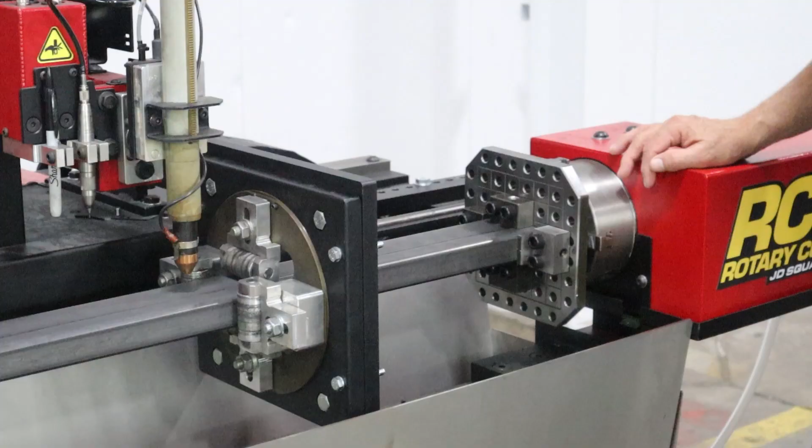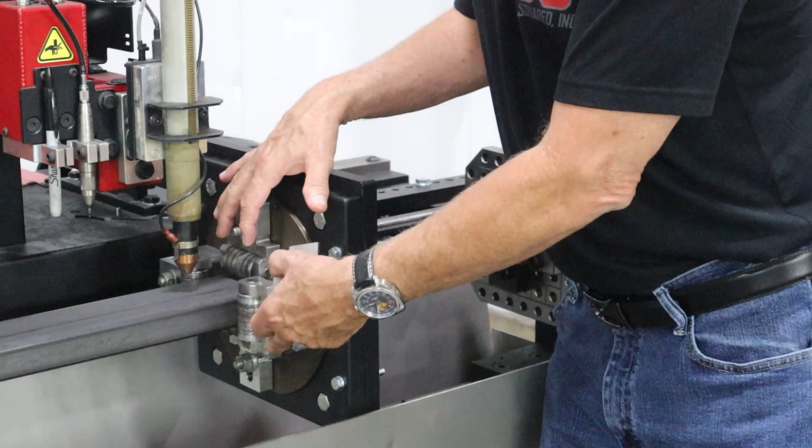I went ahead and zoomed in so that you could see we have installed the square tube stabilizer. As shown in prior videos on the stabilizer, we used our gauges to set our rollers. Very easy to do. We've also utilized the universal jig plate for this particular application.

These are very simple. They're essentially a plate with a grid, a 1x1 grid, 6 by 6 inches total, that has been drawn on it or engraved in it. Then we have different blocks that we could position in different locations in order to handle weird shapes, for instance, angle iron, channel. In this particular case, we're only handling rectangular, so it was pretty easy to do.

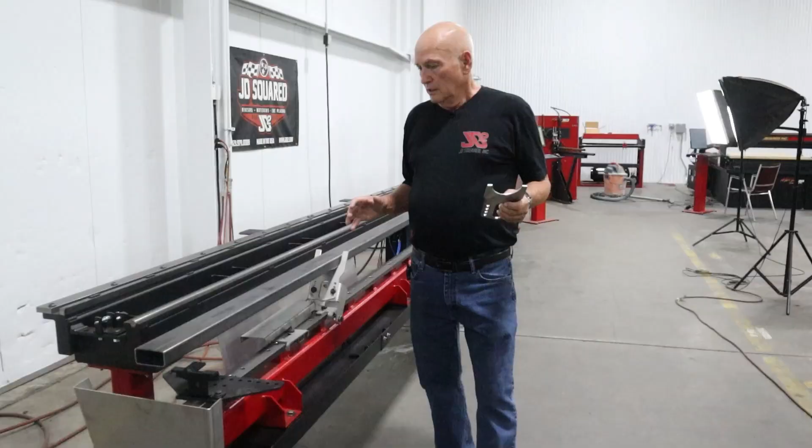All right, let me go ahead and reposition and show you the machine in entirety so I can show you the next thing that we did to set up for this job. I'm at the far end of the RC6 rotary cutter to show you a couple things.

In this particular job, we're going to be utilizing 2 lifters in the RC6. You can mount up to 4 lifters, but this job we're going to use 2. What we've got is, this is the lifter right here. Now, we made the lifter so that we could alter the plates that we bolt onto it depending on what kind of profile we may want.

So it turns out that for this 1.5 by 3 inch rectangular tubing, it's just about 3 1/4 inches from corner to corner, like this right here. So what I did, I went ahead and made a plate that was 3.3 inches in diameter, or at least the arc is, and then we brought the sides up 1.5 inches. Now that will help support the rectangular tubing as we rotate, but keep in mind that it isn't going to do what the rings would do.

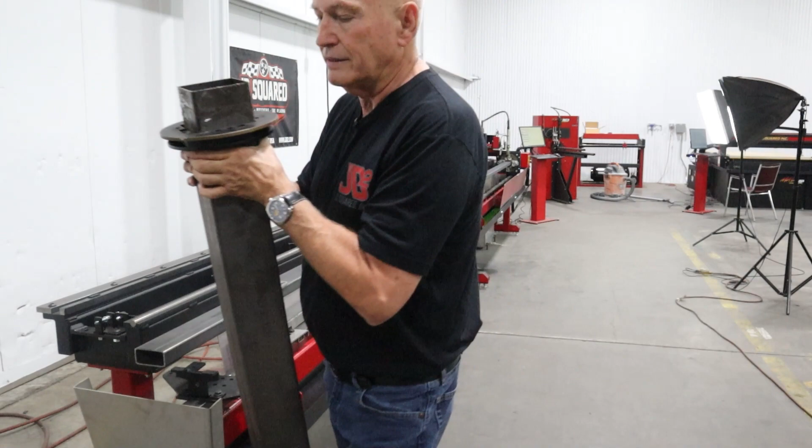This, for instance, is a ring assembly on some square tube right here. This we would be able to roll in our bearing blocks and basically have perfectly smooth motion. We're not going to get that with the lifters and these plates. What we're trying to do is hold the tubing up, kind of hold it in the middle, so it's a little bit clunky.

Now if you notice right here, I have a piece that is supplied with the machine. It folds up flat, and the reason I have it down here is whenever I home this machine, I place a piece down here that I can roll up like that, so that when the lifters fall—because whenever we home this machine, all the lifters have to get out of the way so that the head could go by—I'll use this to support the end of the tubing. So that's just a quick little tip for you right there.

Anyway, I'm going to go ahead and place in the stainless steel guards so that our water is routed into the tray, and we'll start cutting on this thing. One of the first things we need to do after we load our tubing up is for the machine to know where the center of rotation is.

So we're going to go to the right top screen, and I am going to pick a wizard. Here in the wizard, we have currently 3 choices: structural, round, or rectangular/square. Let's go ahead and pick rectangular.

All I have to do is fill out the boxes. One of them is asking for the tube width. We're going to put 3 inches, because when we created this program in Cam-A-Lot, we started off with the large side flat. So we're going to say 3 inches. Then we're going to go over here to tube height, and we're going to say 1.5.

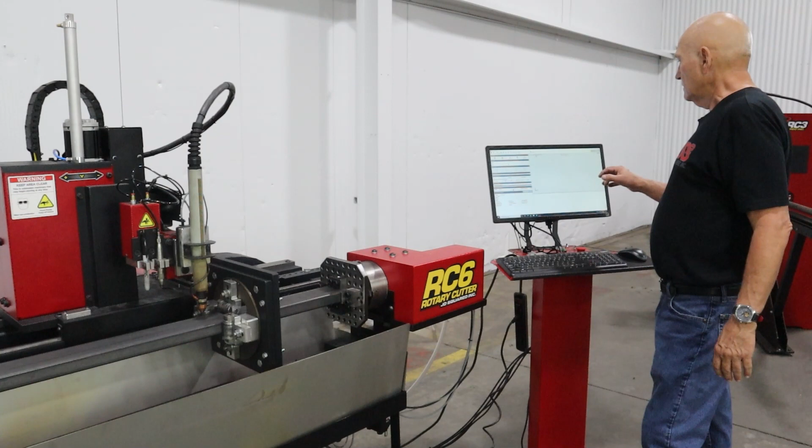And what it did, when I returned back to the plasma cut screen, it has generated a small program that the RC6 is going to run to find the center of this. Let me zoom in on that so you can see it a little better, and then I'll hit the go button.

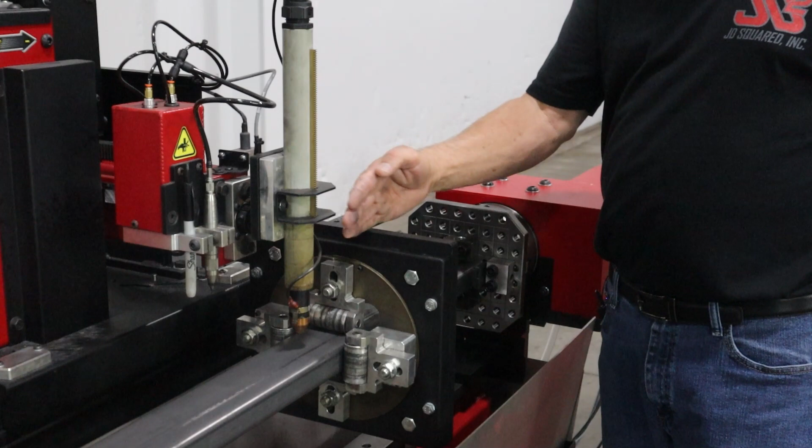All we need to do is position the torch somewhere in the middle of the tubing, just above it, and we roughly have it leveled. It doesn't need to be precise. Let's hit the run button.

So what it's looking for now is how far out of line is the chuck. Do we have to rotate a little bit to get the top surface flat? All right, now it's going to check both ends of the tubing to locate the middle of the tubing.

Okay, we're done with that. The RC6 now knows where the tubing is at. Keep in mind that you only need to do that when you first load a piece of tubing. If we were doing 100 of these, we would not have to keep repeating this, only for the first job.

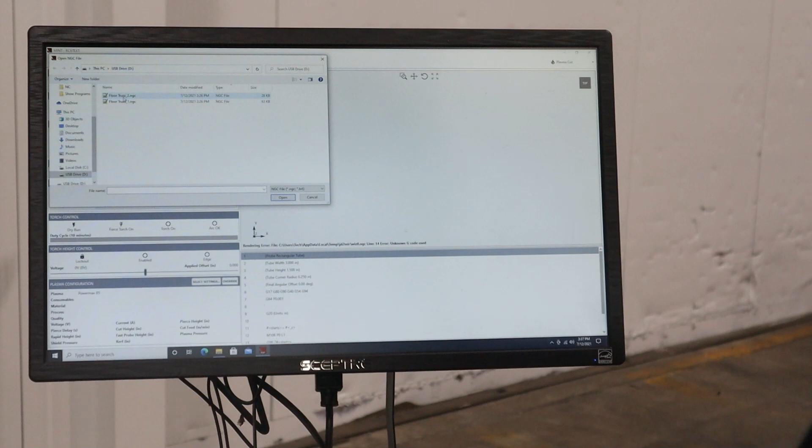All right, now we need to go ahead and load up our program. So I will go to File, Import NGC, and looking at the USB drive, I'm going to go ahead and pick floor truss number 1. This was the code that we generated earlier in Cam-A-Lot.

Now if we roll this over here, you can kind of see what's going on in the view, what we're going to be doing. All right, so the next thing we need to do is tell the RC6 where on the tubing do we want to start cutting. Let me reposition the camera and show you that.

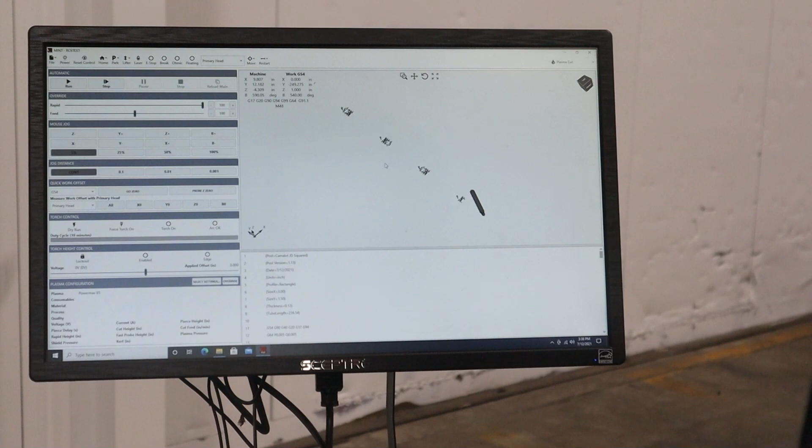All right, I'm back on this end of the machine right here. Let's go ahead and run the carriage to the end of the tubing. Now, when we generally run a program, we're going to move the torch to where we want the RC6 to start executing that program. Notice the lifter is automatically lifting and getting out of the way.

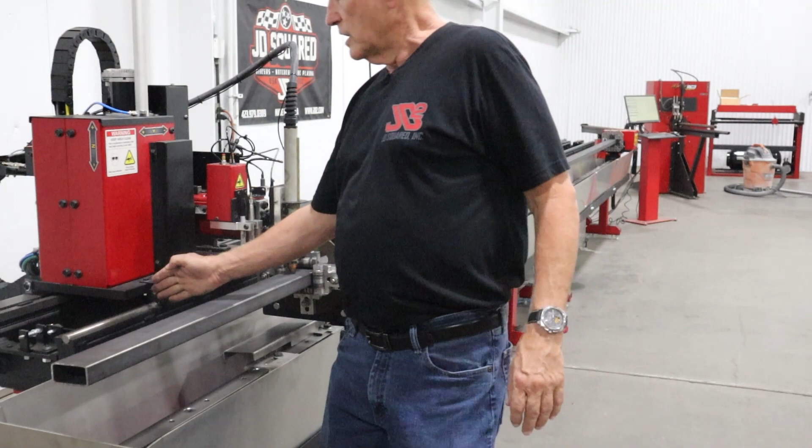Now, what we're going to do, we'll get a little bit of help here, we want to come as far as we can down this frame rail without actually going to the end. If we do go to the end, the carriage will not fall off the machine, but it will, however, hit the bump stops, which will reset the machine, making us have to rehome it.

So we don't want to get that far down. We want to get to about an inch or so. The bottom line is this tubing that we put in the machine is a little big for the job we're doing. We could have cut it shorter, but we just threw a piece of tube in.

So, all right, Ryan, if you could do me a favor, just give me a heads up when I'm about 2 inches from that right there.

We got different speeds that we could run the machine at. We're going to go medium speed. Now we're going to go slow. How far? Good right there?

All righty. So what I'm going to do now is I am going to select Y0 under Quick Work Offset. And what the Y0 setting is going to do is the RC6 now figures that this, as far as that program is concerned, is the 0 point. We're going to start cutting at this particular location right here.

So let's go ahead back to the other end, and we're going to run the program. However, if we turn on the coolant, it's going to run off, we're going to flow out over here. So give me a second to figure out what I want to do there to prevent that from happening, then we'll run the program.

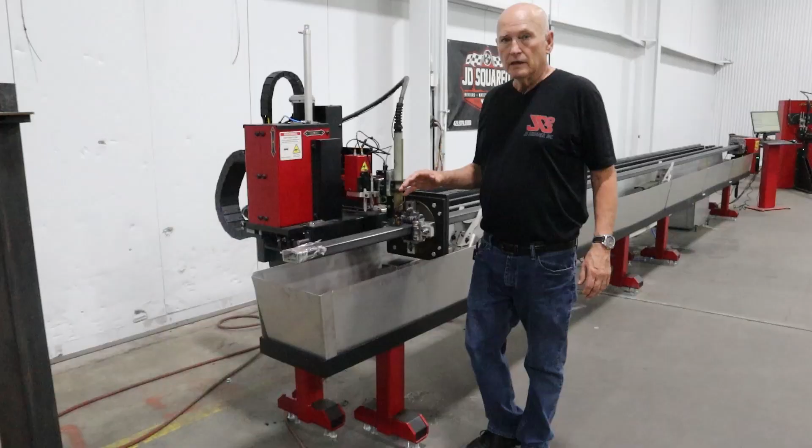Devin came up with a pretty good idea on how to seal the end of the tubing: just simply use packing tape. As soon as we cut through the tube here, the coolant will start running out that side and we won't have an issue anymore. So the only thing we're going to need to do now is go down and tell the RC6 what material we loaded, mild steel .125 wall. That's the subject of another video. You can check that out. But let me walk down to the other end.

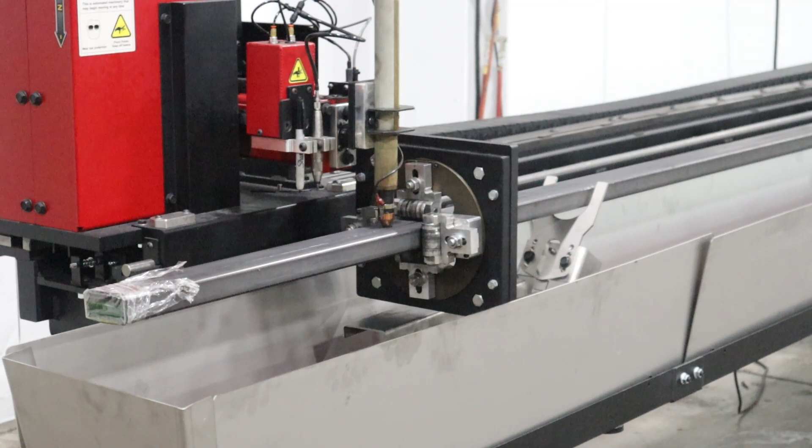In the meantime, Ryan, if you could do me a favor and zoom in a little bit so that they could see the stuff being cut and marked. All righty. Way down here, I am going to go to select my settings. I'm going to pick mild steel. We're going to pick 10 gauge, and we're pretty much good to go. All right, let's hit the run button.

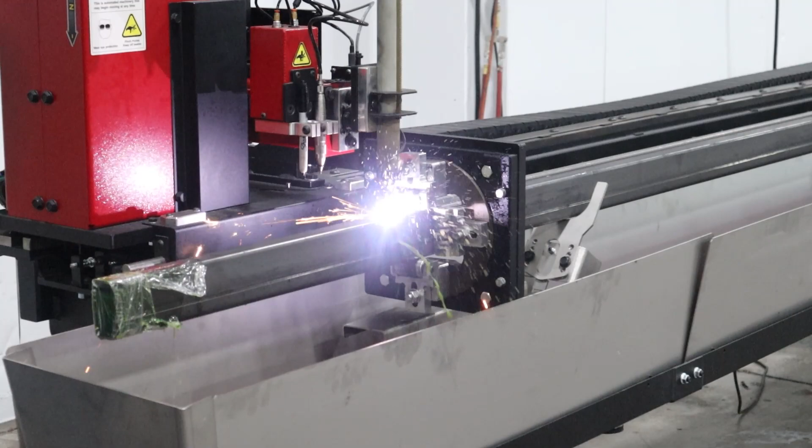All righty. First thing it's going to do is use the marker to mark. Looks like it's going to be number 24. It is. I'm going to come over here to this side so that when it cuts, I'll just remove this piece out of the machine. A lot of coolant.

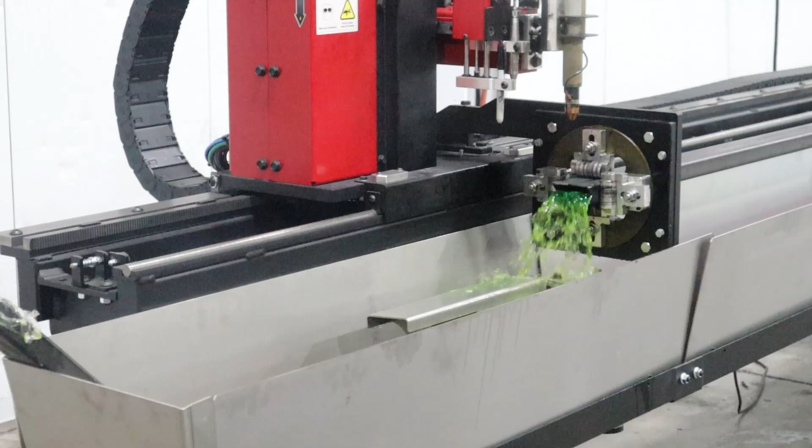Now, I can catch every single piece, or I could just let them fall. Let's watch it fall. No big deal. Once again, it has grabbed the marking tool. This is probably going to be number 23. Yep. All righty. You can see the automatic lifters retracting.

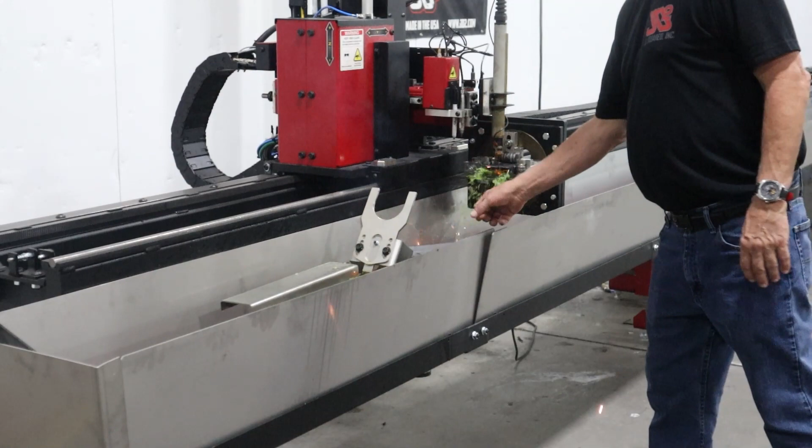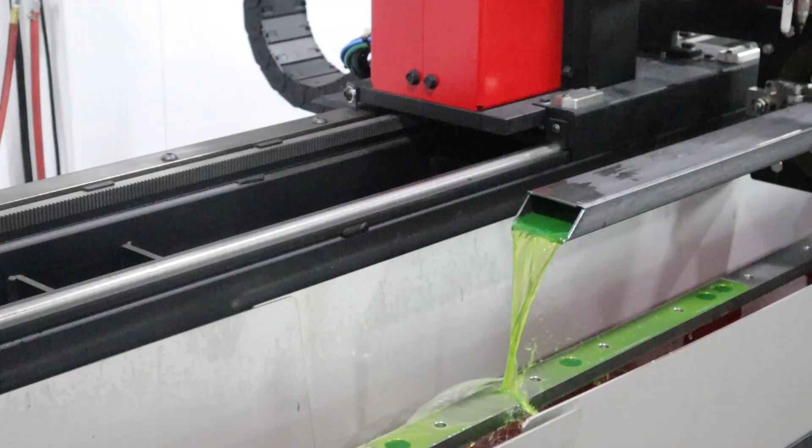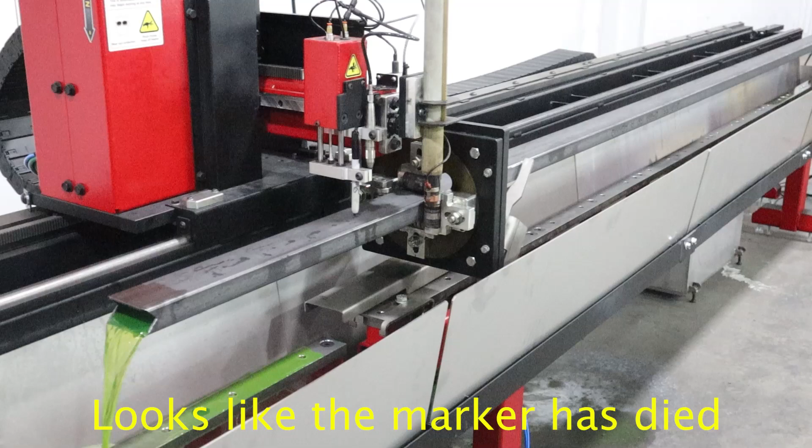Yeah, a little bit. All right. So if we look at one of our pieces right here, you can see very little slag. Well, I think you can see it. But this is what we're going to be putting together to create that truss. No marks.

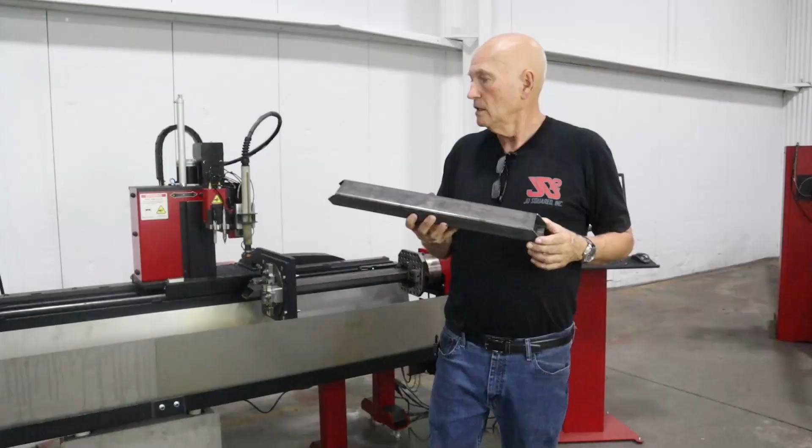We've completed the first program. We've cut out basically 10 of these parts here. I think you could see that we have marked them. So this is part number 21. I am now going to go ahead and load up the second piece of tubing and we'll process that one.

Go ahead and turn the marker on, push the button. That looks nice. I had to put a new marker in it. The other one kind of ran out of ink. Oh yeah, it looks really good. Nice 13.

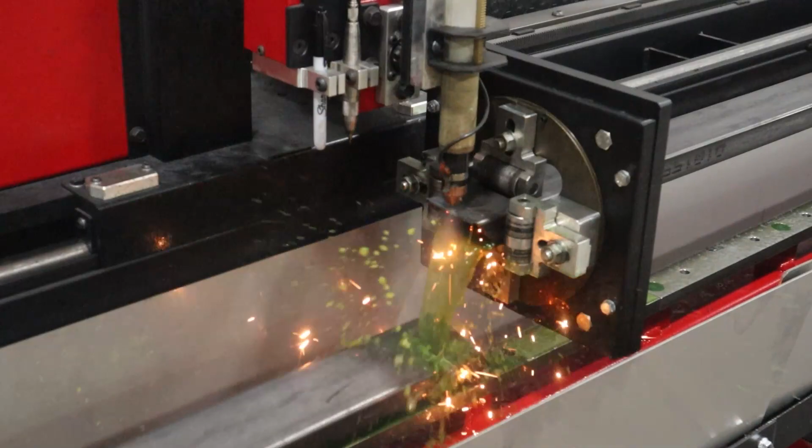Okay, I'm going to go ahead and pull the camera off the tripod so that we can get a little closer view of what's going on. Alrighty. It has dropped the marker. Now it's going to mark this part number. Part number 11.

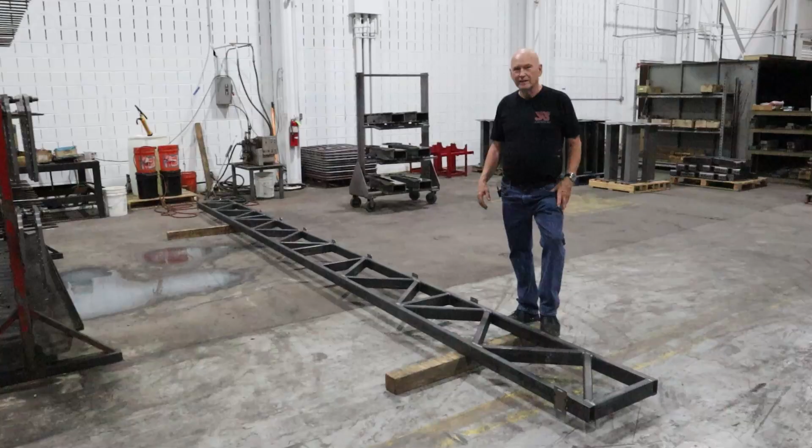Okay, we'll let this continue cutting. I think it's only got 2 more parts. So I'll go ahead and kill it right here and then I'll show you the finished product. Well, we did it. This is our truss. Takes about 4 people to move this thing. It's heavy as all heck, 22.5 feet long. And you saw us make all the diagonals in the RC6. We could have done the verticals too, but sometimes a saw is the way to go, and this was one of those cases. Well, I hope this video was educational, both parts of seeing how the machine cuts and also Cam-A-Lot.

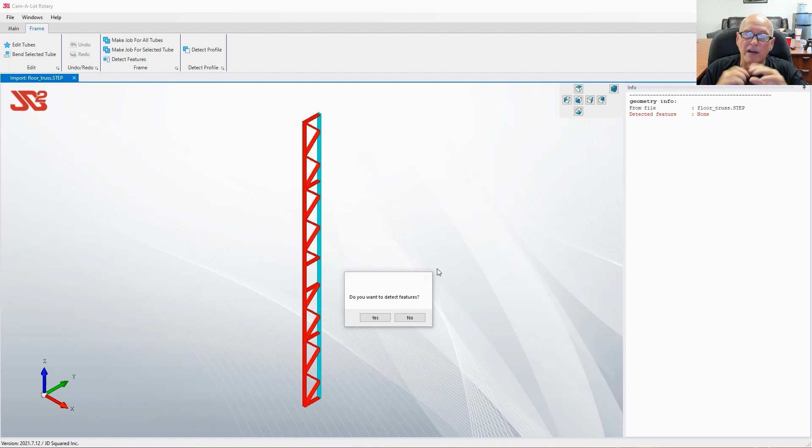But you could have other sizes of tubing in your structure, just different wall thickness, different sizes, and Cam-A-Lot will go through that, find all of the different sizes, organize them into different jobs so that you could go out to the machine and create it. However, for this application, it is just one size of tube. So let's go ahead and select, yes, I do want you to detect features.

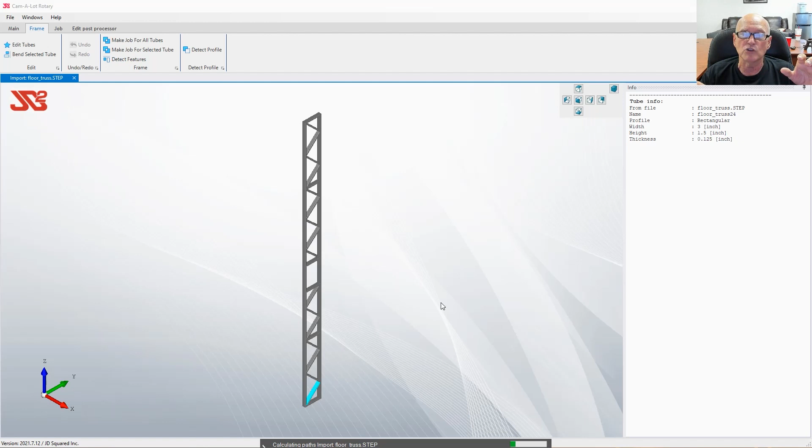And you'll notice Cam-A-Lot will be popping up a screen here in a minute as it identifies these individual parts. And what it's asking right here is, do you want to make a job for that? We're going to say yes. Now it's going through the individual parts. Now a job is going to be the file that we are going to tell Cam-A-Lot where to make the cuts. Do we want to put special markings on it, which we are in this project, things like that.

So you can see the progress bar down here. Cam-A-Lot is going through that entire structure. It now wants us to save the job. We're going to save it as floor truss, yes. And there we go. We now have a job created for this part. Let me go ahead and show you some of the things you see on the screen, since this is a tutorial of how to use Cam-A-Lot.

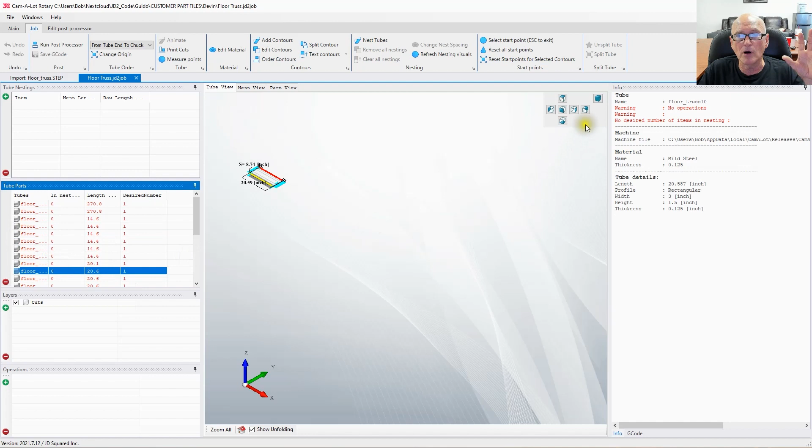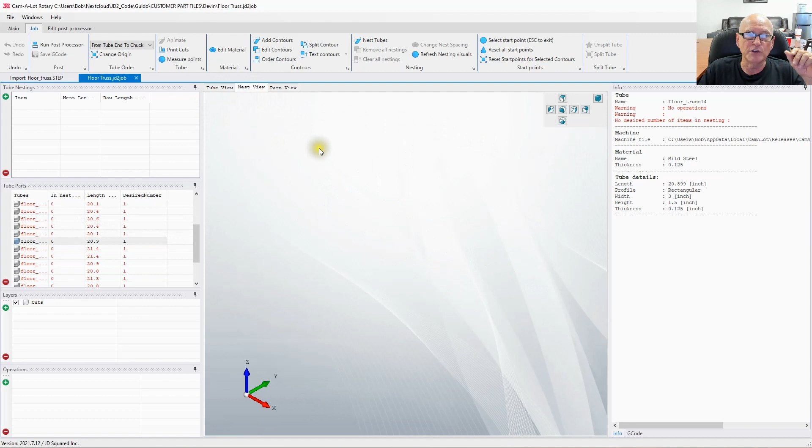Right here in the central viewport, you have 3 tabs. One is tube view, and what that's going to do is when you come over here to tube parts, if you select the different parts, it is going to allow you to see what those individual parts look like. If we go to part view, you will see the entire structure, in which case you could come along and select a single part here, and it will highlight it over here, so that if you go to tube view, there's that particular part right there. Now the nest view tab isn't showing anything yet because we haven't created a nest.

Let's look over here on the left side. You obviously now know what tube parts is doing. We just select on the individual parts. In this particular panel here, we can override by double clicking, for instance, the number of parts that we may want to make. In this case, we're not going to want to make any more than one because we only need 1 truss.

Now down here in the layers panel, when Cam-A-Lot creates structure like what we're seeing in a job, it's going to break things down into layers. Now a layer can contain a number of similar items such as contours, markings, things like that. Well, what we call a cuts layer is typically what you see on the screen in front of you, the ends of a structure or a piece of tube.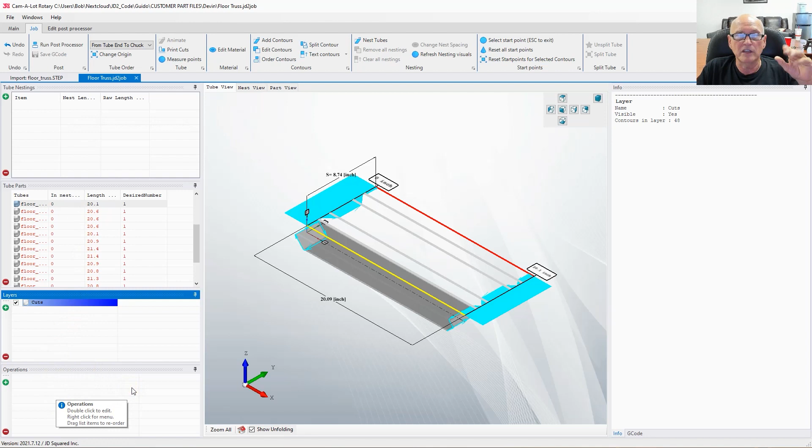Now, if these parts had holes in it, they would have been placed on the layer holes by Cam-A-Lot. Also, if there was markings on it, such as part numbers or a logo that you may have imported as DXF and placed on your part, it will also place markings into a separate layer. Now, if we come up here to tube nestings, we have not created one of those yet, so therefore it is empty. And down here in the lower left is where we create our operations. So let's go ahead and do that now.

To create an operation, come down here to the lower left panel, Operations, and click on the plus sign. And that will bring up our Operations dialog box. We have a Powermax 85 selected. That's what's on the machine. We set that in the main settings in Cam-A-Lot. Now, Cam-A-Lot has gone through and already determined that the metal thickness is .125 wall, so we don't have to do anything there. Now, if we look right here, we have layers.

We only have 1 layer, cuts, because that's all Cam-A-Lot could find. That's all there was in that structure. Right here, we have the contour offset, and we could change the offset. I've shown that in similar videos or earlier videos, such as the card holder video. And essentially, you're going to want to place the kerf half of the distance away from your contour that you want to cut, the kerf being the slot that the torch is cutting through the part.

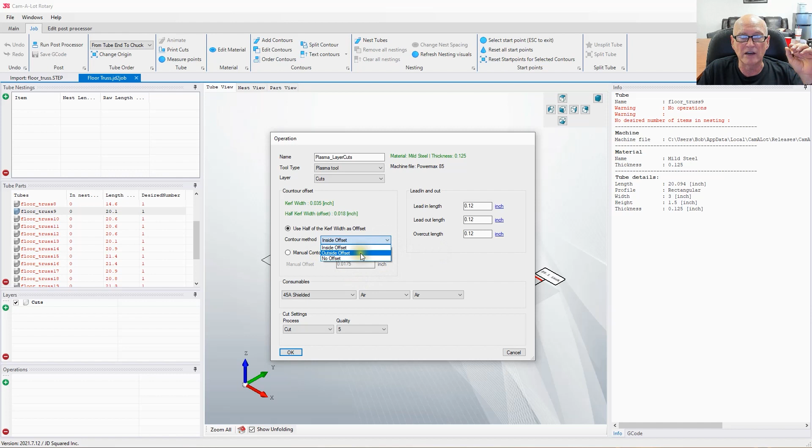So Cam-A-Lot is going to look up into its database tables supplied to us by the plasma power unit manufacturer and determine what that kerf is. Now we need to go ahead and select 45 amp shielded because that's what we're dealing with on the machine out there. Now it's going to offset it 17.5 thou. We're going to go ahead and pick outside offset and select OK.

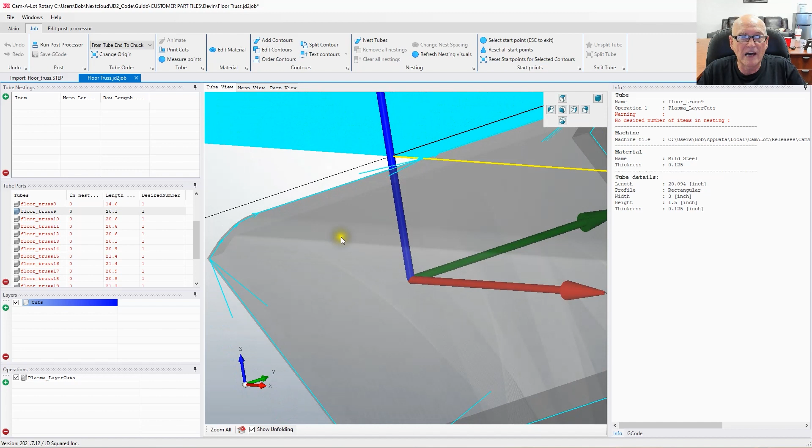Alrighty. So what we're doing now is if we zoom in and we look at the different parts, let's go here. I want to show you. Okay. You could see where we have applied an offset, but we have applied it the wrong direction of the tube. You can see that we've actually offset inboard. Now, I'm going to tell you straight up, this is a recently identified bug. It's a very minor deal. It's not a big deal. However, rest assured, we are in the process of fixing that.

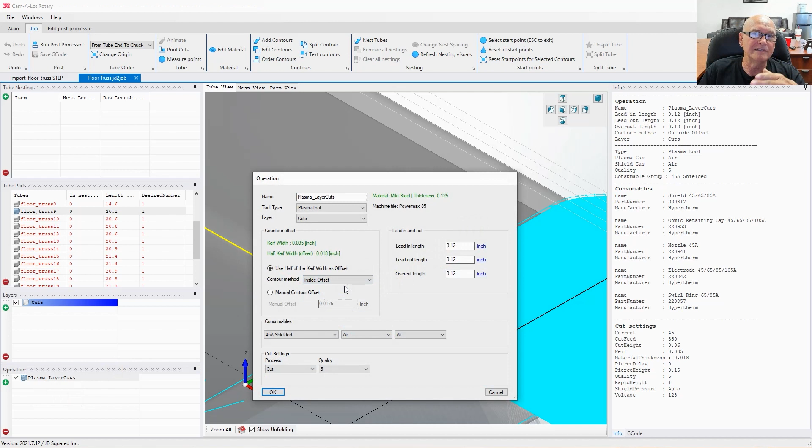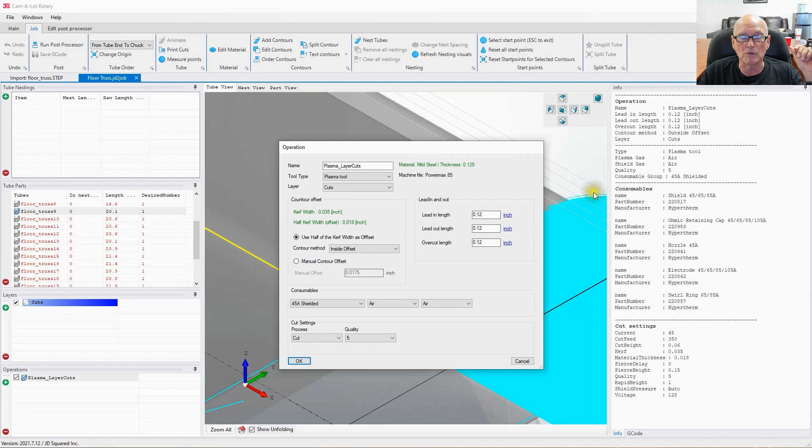So let's go ahead, go back to our operation, left click on it, and edit it. And instead of an outside offset, which is the correct method, we're going to go ahead and select inside to temporarily move it to the other side. Now this bug evidently came about because we are adding structural shapes to Cam-A-Lot, angle iron, channel, and we've had to change the algorithms that are handling the contours, and evidently we made a slight mistake there. I wish we were perfect, but we weren't. Good news is we write the software and we can fix this problem relatively quickly. Let's go ahead and say OK.

Alrighty, now if you noticed, we are now correct. If I zoom in right here, you could see where the cut path has now been offset to the outside of the part. We're actually good to go if we wanted just to go out there and cut these, but we don't. We want to go ahead and use another feature in Cam-A-Lot because, as I said earlier, all of these diagonals may be slightly different from each other. So it would be of great help if we could number these, and Cam-A-Lot will allow us to do that. So in order to do that, we're going to go up and select text contours and select part numbers.

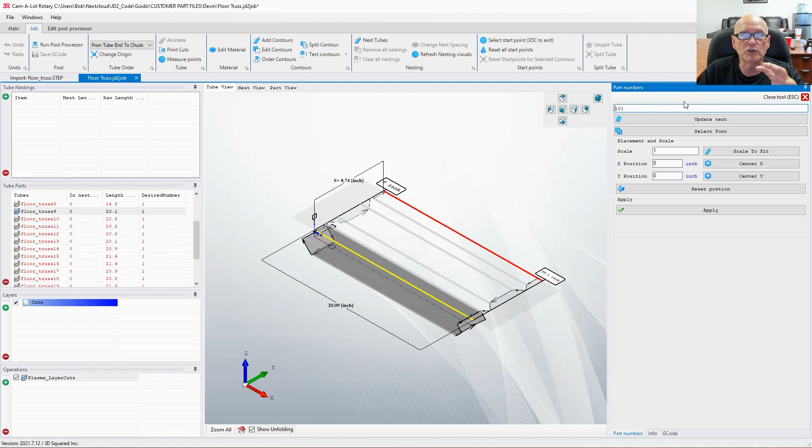And we're going to come over here, and if you look, it says part underscore, and then it's got the squiggly parentheses and a 0 in the middle. Now what the squigglies are going to do is apply this auto incrementing number. So if we do this to all of our parts, it will auto increment the number 1, 2, 3, 4, 5. Now, this part in front of it, we could put whatever we want on it. You could type in a part number, whatever you want. We're not going to do that because we just want a number that the welders could refer to on the drawing and know to place that part in the right spot.

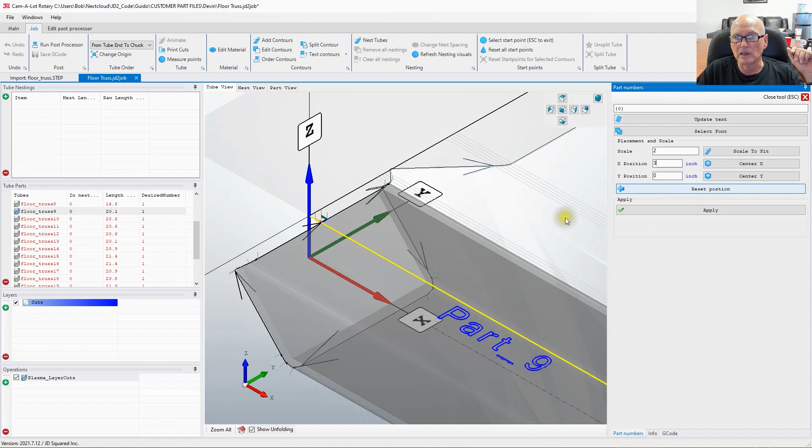Let's go ahead, and if I zoom in over here, you can actually see what it's going to put out, right? Part number 9, because I haven't updated anything yet. Let's go ahead and increase the size of the scale. I want it a little bit larger, and I also want to move it over about 3 inches because I know that's a safe distance on what we're doing on this part. Now, if I select center Y, let's zoom out here a little bit, it moved it to the other side over there, but it centered it on the part, which may work good. So let's go ahead and update our text. Now we just have our number 9, and we go ahead and apply it. All righty. Give it a second to apply.

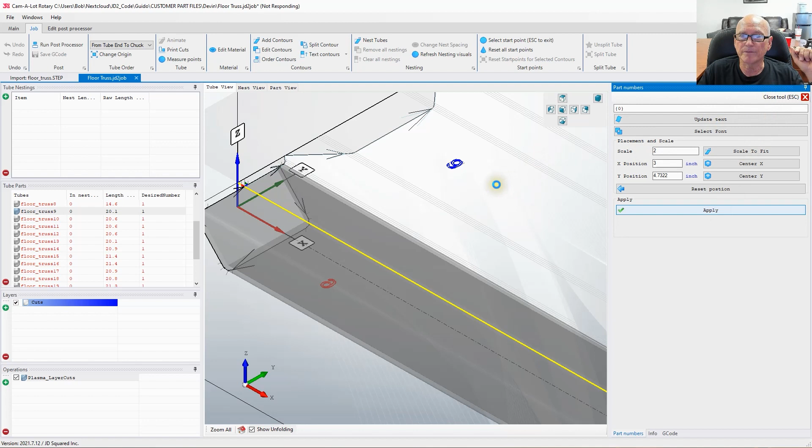All right, we did all that. Let's go ahead and close this tool. Now, if we were to go look at the different parts, you see the number right here? 13, 11, 12. So we now can make an operation to put these part numbers on those parts out there.

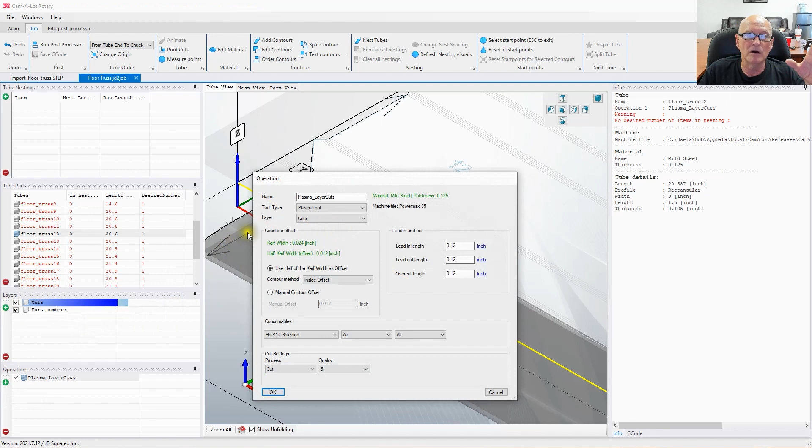So once again, let's return to operations and click the plus button. But this time, if you notice over here, we have a new layer called part numbers. So we are going to select that layer and we are going to use the marker. Now we could scribe it. If we scribe it, it's a permanent mark in your metal. If we use the marking tool, it could be later removed with acetone or something like that.

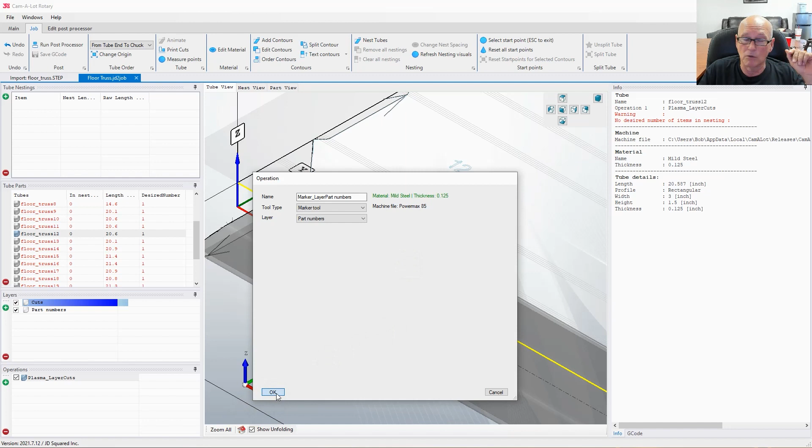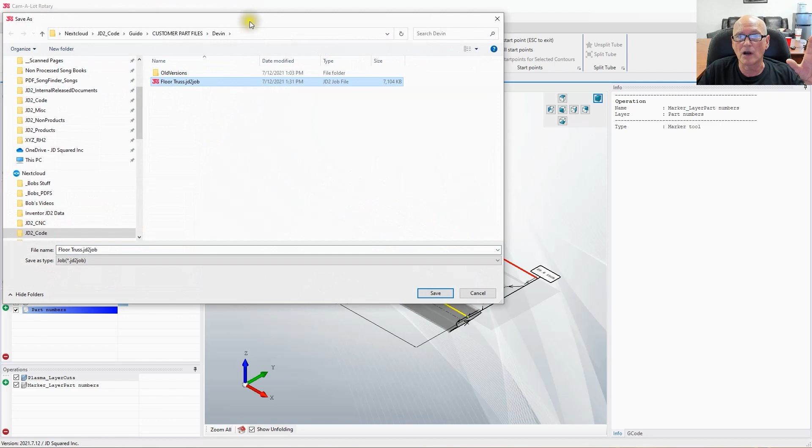Notice there's no kerf width settings because we are not cutting a slot. We are basically working right in the middle of the tube, or right in the middle of the contour. Alrighty. So we now have both of our operations. The next thing we're going to want to do is nest everything. Before I do that though, I'm going to go over here to File, and I'm going to select Save Active View As. And I already saved the first one as floor truss, right? I'm going to go ahead and save this one as a different number.

And the reason I'm going to do that is I learned the hard way using another software that I used for over 2 decades, and it crashed so many times that it got me in the habit of saving often. So that's what I did. If you notice, the file name changed up here, and the reason I did it was if I make some kind of irreversible mistake, I could simply go back and open up that file and continue on where I was. Cam-A-Lot has undo and redo features, but only up until the time when you accept what you're doing or you save your work. And just like all CAD programs, that's the end of your undo train right there.

All right, so let's go ahead and create our nest view. Before we go in nest, let me show you something else down here in the operations panel. We created the layer cuts first, remember? And then we created the part numbers to place on the tubes. Well, when Cam-A-Lot orders all this, it may come along and cut off both sides of the tube, then try to mark. Well, it can't do that because the tubing is now fallen out of the machine.

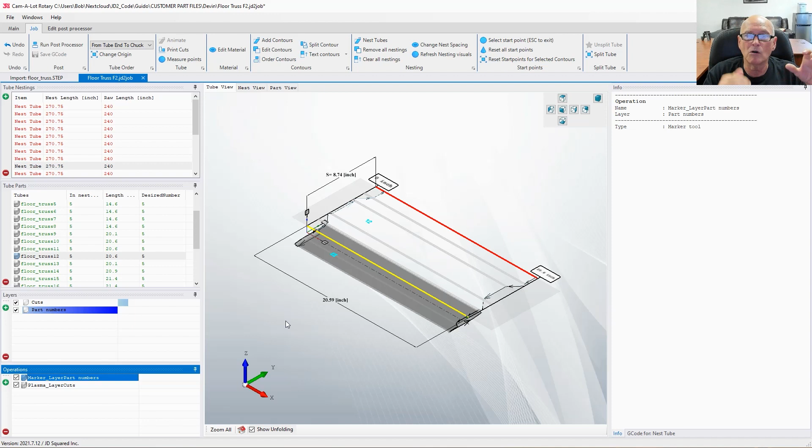So what we're going to want to do is reorder the operations over here. So I am going to hold down the left mouse button on layer part numbers, and I am going to drag it up one, and you can see where now it's a higher layer. So it's going to do this operation first. We are currently working on a very intelligent part ordering scheme to where Cam-A-Lot is going to come along and auto order everything for you, and then give you a couple of options of how you want it to auto order those contours. So look for that in the near future.

Okay, now we're ready to go ahead and nest our tubes. Looking up at the ribbon bar here, you'll see a nestings group. We are going to select nest tubes, and that will bring up our nest tubes panel over here. This is a tutorial video, so I am going to explain a few things.

If we want to, from the point on the tube that we tell Cam-A-Lot to start cutting, not necessarily the end of the tube, because remember, when you take a program out to the machine, you're going to move the cutting torch to where you want that program to start cutting. It's 0 point. What the front spacing means here is, do I want to move that start in a little bit? Maybe say, I don't want to start where I'm telling you, I want you to start 5 inches inboard. That's what that does. Mid spacing is the distance between parts.

Right now, this is a work in progress because we are creating the full automatic nesting, a very intelligent nesting where Cam-A-Lot will rotate all the parts, fit them together, trying to minimize the amount of tubing used. That will be fully automatic. Look for that in the near future. Back spacing is just how much distance you want Cam-A-Lot to leave at a minimum between the last cut and the chuck that's actually rotating the parts.

Now, right here, this is an important number. It's basically the length of your raw tubes that you may have bought from the supplier. Now, the length of tubing that we've got for this job is 24 feet, 288 inches. The maximum cutting capacity travel of the machine with the square stabilizer in it is 21 feet 9 inches. It's not a problem for our job. However, you'll see what's getting ready to happen here in a minute.

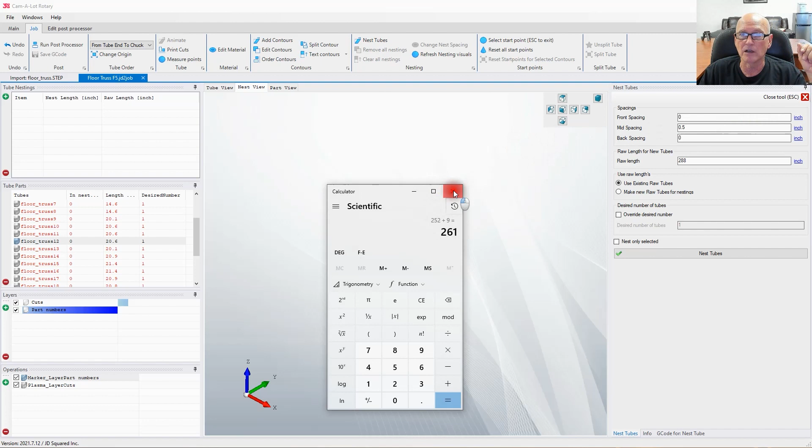So what I could do on this part right here is lie to Cam-A-Lot and tell it that I don't have 288 inches. Let's bring our calculator over here. 21 times 12 plus 9 - we have 261 inches. So I could lie and tell Cam-A-Lot that, which I think I will do.

Normally, most people are purchasing 20-foot lengths of tubing, which gives us plenty of travel, plenty of room. But in this particular case, they ordered 24 feet.

Now if we look over here, this is where we can select a part. It'll highlight it up there, and we could select the desired number we want to cut. Now, the guys out there have already gone ahead and cut all of the straight lengths to length at a saw, because let's face it, that's the best way to do it. We could have done it in Cam-A-Lot, but it would have just been more work for no real reason.

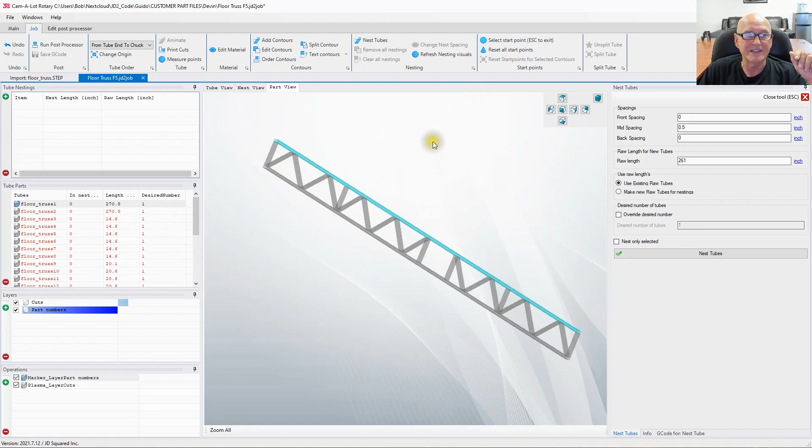So what we're going to want to do is take these parts and set the desired number to 0. Also these straight parts, these right here, 1, 2, 3 - those parts we're also going to want to set to 0. And if you notice, they're 14.6 inches over here. They're really 14.625, but Cam-A-Lot is rounding that up. I'm going to change that to where it actually puts out the real thousandths number.

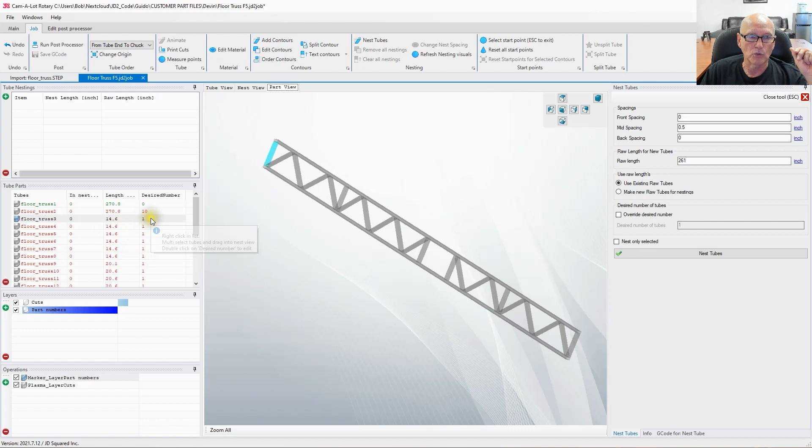Let's say we don't want to cut 10 of those, we only cut 0. So we're going to go ahead and change this to 0, 0, 0, and one more 0.

Okay, now Cam-A-Lot, when we go to nest, it's only going to process the ones that have a desired number next to it. Over here, I can override this desired number by selecting this and then coming over here and telling it what number I want to override by. It will take this entire listing and multiply it by whatever number we put there. So if you wanted 10 trusses, you could override desired number, put 10, and there's your go - you're going to end up with 10 trusses.

Over here on the left, we have tube nestings, and this is where if you hit the plus button, I can enter an existing piece of tube out there. So let's just say I have a piece of tube out there that's 122 inches long. I can go ahead and enter that. Now look what Cam-A-Lot did.

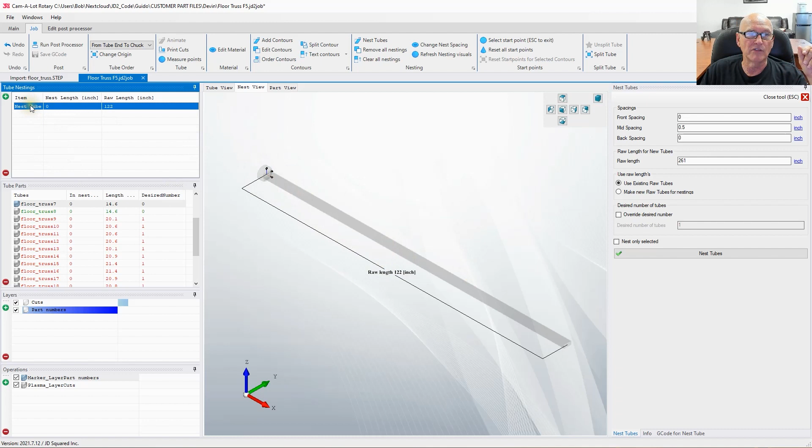When I go to nest view, instead of being empty, it is now showing us that 122-inch length of tube because it has one to work with. However, we're going to go ahead and remove all nestings because I do not have a 122-inch piece of tube - I made it up. Okay, at this point in time, let's go ahead and hit nest tubes.

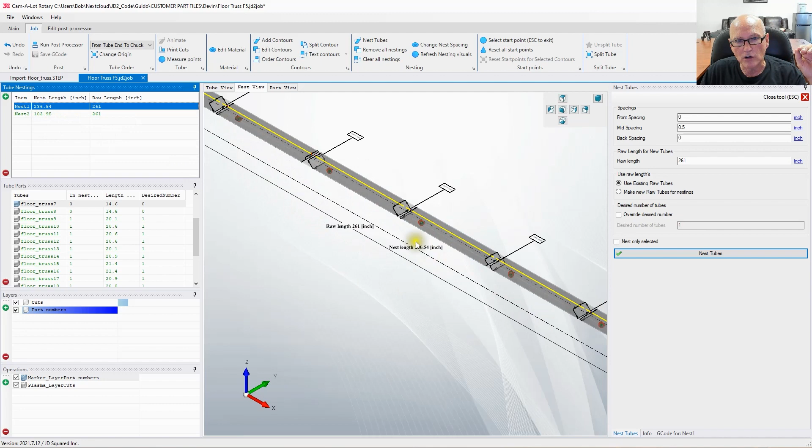And just as fast as you could blink your eye, it did it. And what it figured out is right here, we're going to need 236.54 inches. You can actually, it'll show it to you right there. That's how much tubing we're going to cut for the very first file that we load onto the machine.

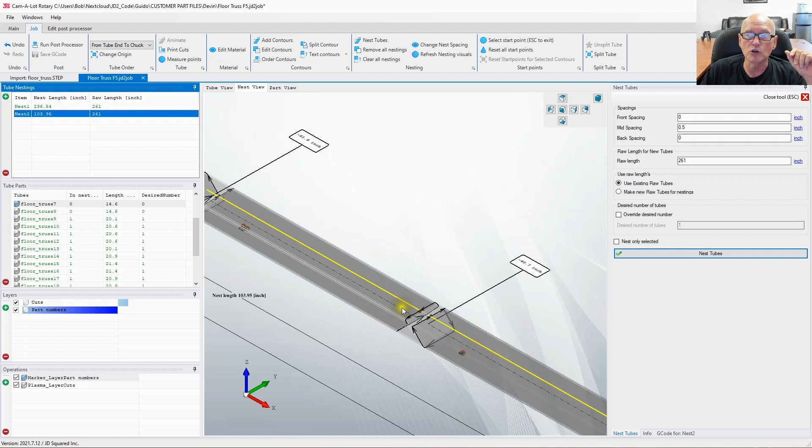Now the second one is much, much shorter - we're only going to need 103.95 inches of tubing. All right, now if you zoom in, you can see what I'm talking about on the smart nesting. If we could have flipped this part 180, we could have slid it towards this part, saved ourselves maybe, I don't know, half inch, an inch of tubing. That is currently what we're working on when I mentioned the smart nesting.

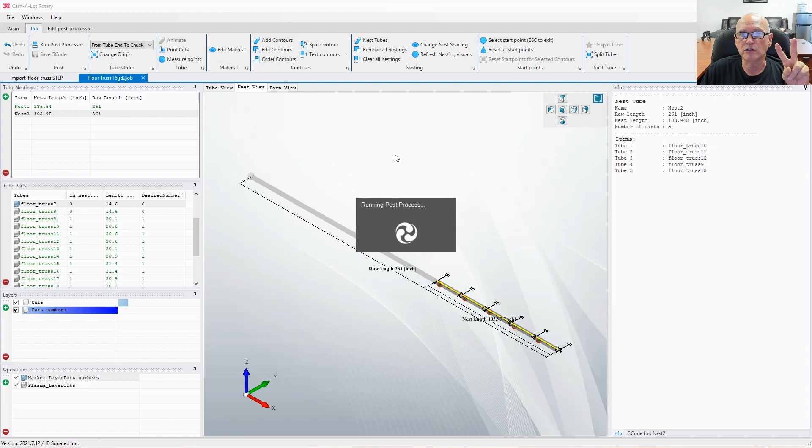Now all we have to do is run the post processor, and it's doing its thing, and it is now creating G-code that we're going to be able to put onto a USB, take out to the machine, and cut these parts out. It's going to be creating 2 files. So there's our G-code right there.

Now if I go over here to nest 2, you see the code right here listed? It's G-code for nest 2. If I go here, G-code for nest 1, it's different G-code. So we have 2 separate files that we are going to take out to the machine.

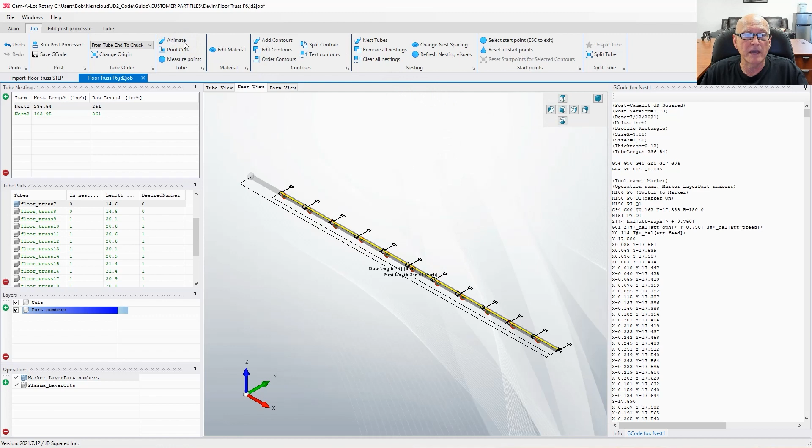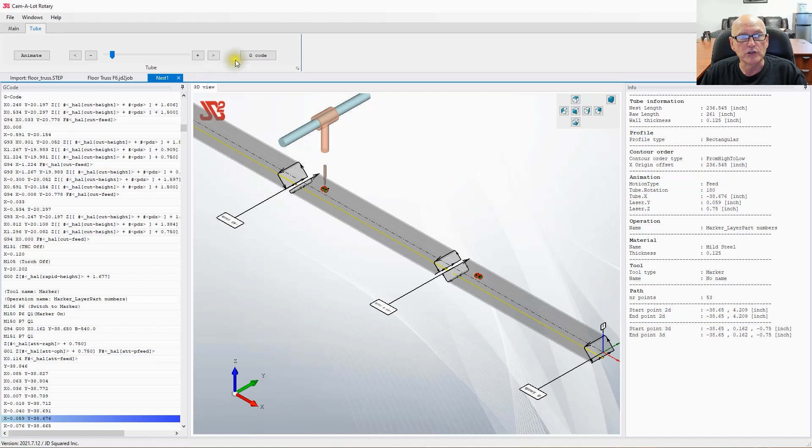Before we go out there, let's verify that Cam-A-Lot has indeed generated code that's going to work for our application. We're going to go to Animate, which is now active because I ran the post processor. At the very beginning of the program, you can see it is going to draw that number 24 first. Now if we go over here, we can manually drag this along and see where it's going to go. It's going to cut the end, then that one, then the marking.

Let's zoom out a little bit, it's going to happen a little fast. It occurs to me that maybe we should put ourselves a speedometer over here, or some kind of throttle for how fast this thing goes through it. But if you look at it, it is going in the correct direction. It should be fine.

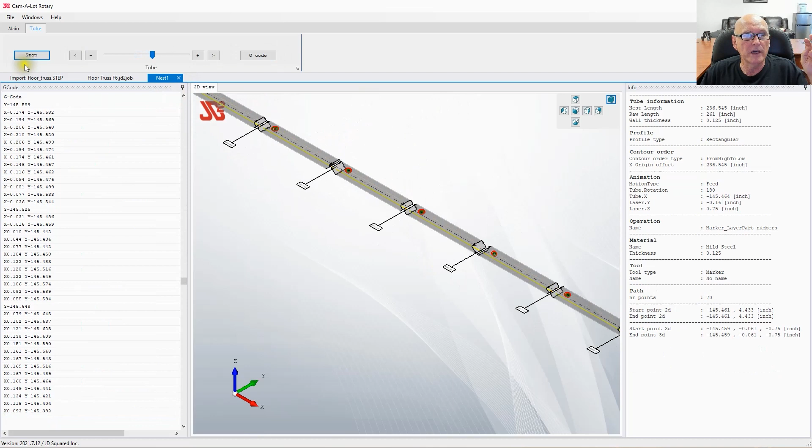Let's go ahead and stop that right there. We're going to go back to the job. Now what we want to do is, we've already created the code, we verified that it's correct. Let's go ahead and save the G code.

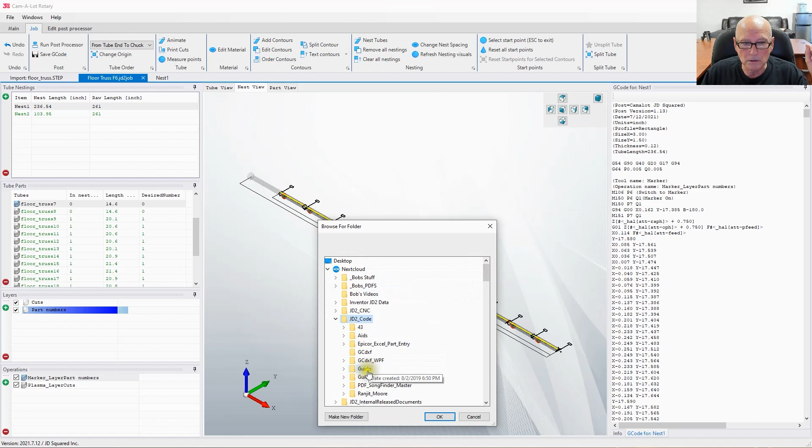It's going to come up and ask what you want to save it as, so I'm going to save it as floor truss. We'll say OK, and now it wants to know where would you like to place it. So let's go to my Nextcloud code, customer files, Devon, and we're going to put it right there. Open containing folder, sure. So right here is the 2 programs, basically this program right here.

Let me see, where did I go? Okay, it is those 2 programs.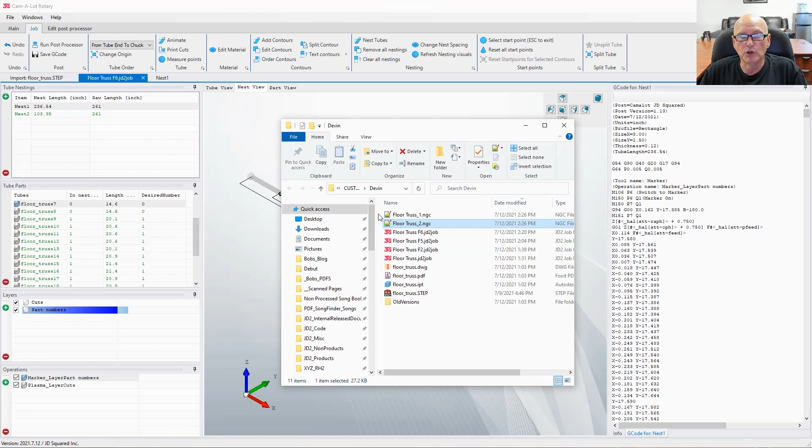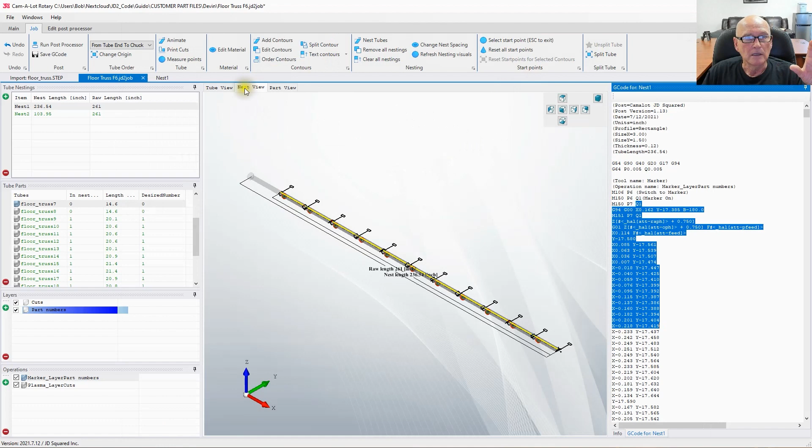Now all I have to do is pull my drawing up that we showed earlier and mark which tubes are what on that drawing. Remember, I have a drawing right here. Cam-A-Lot does not currently have the ability to create its own drawings, that's something we plan on probably working on next year. However, I can take this drawing, print it out, go back into Cam-A-Lot, go back to the part view here, select, for instance, if you look at the drawing, we know that we have one side that has 4 elements. This side has 4 elements, but this one only has 3, and this one has 5.

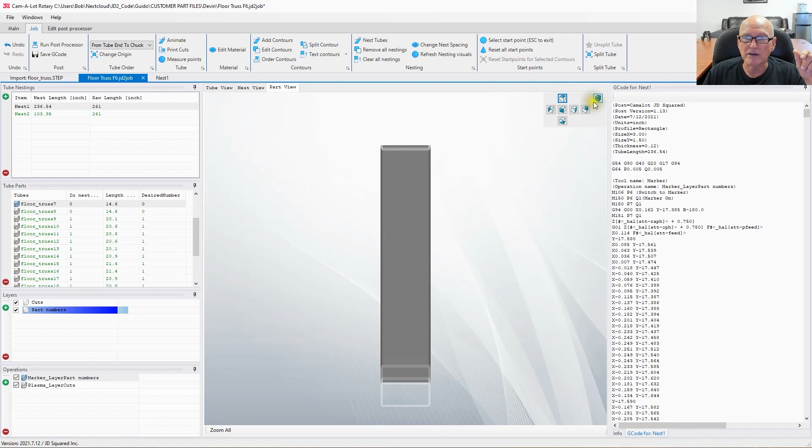So we know how to orientate this thing as far as our drawing goes. Let's get back to it. So all I need to do is select one of the items, and we'll select it on the 5 side. Let's go see what item that is. All right, that is number 17, right? So I am going to pull up this drawing and make this here 17. And then we're just going to march down the line. That one is 16, 15.

So let me go ahead, go off camera for a minute. I will do that, and then I'll show you the finished result.

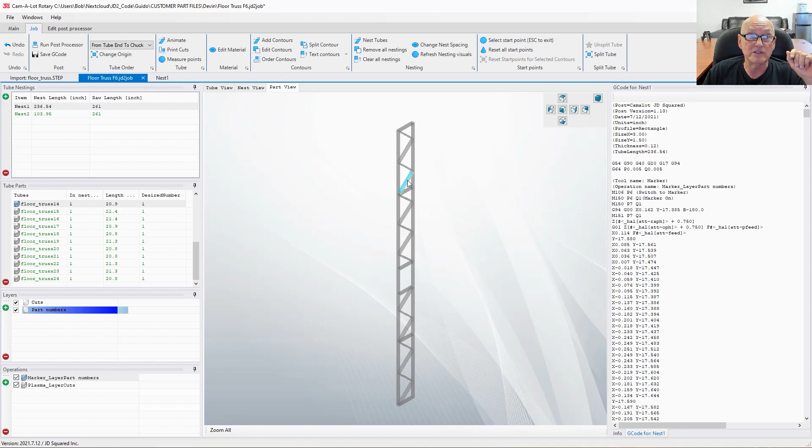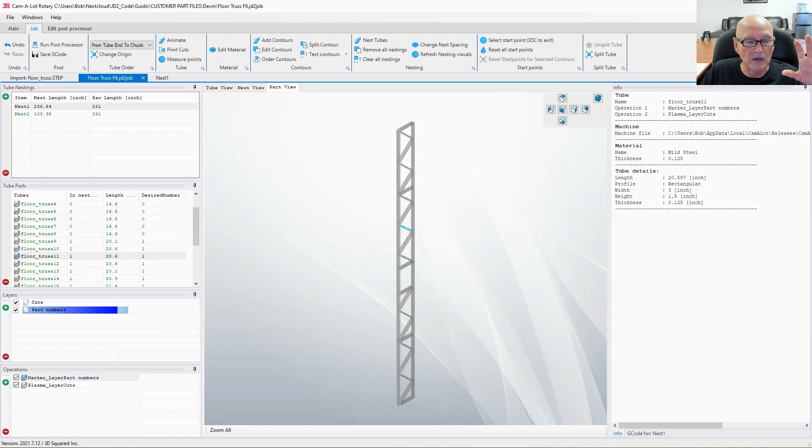What I did off camera was I printed out the drawing that I had made up earlier of the truss, and then I identified - I went into part view, I clicked on this part. Notice it's truss 24. If I go to the next one, it moved up to 23. This is going to be 22, 21, right on up. And if you get up here, we're going to see that it's number 9, and then it's going to be 10, 11. So I took those numbers and wrote them onto the drawing to identify which of these angled segments are identified by the number written on them. That's all I did just now. It's very, very easy to do.

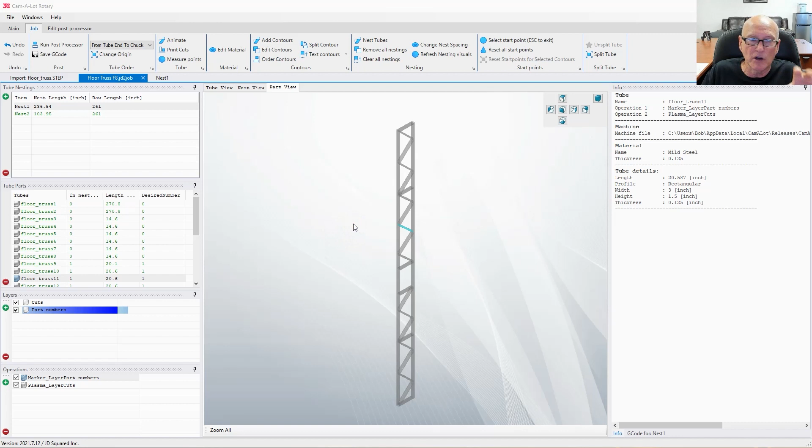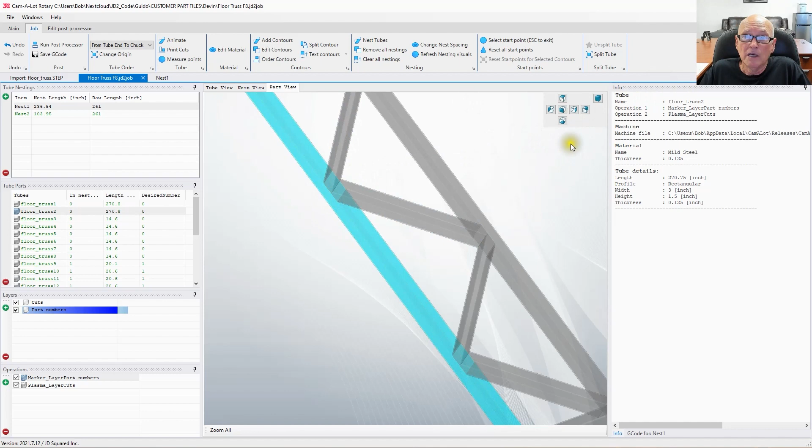I was just informed that they need this part pronto quick, so we are not going to do the next feature that I was going to show you, which is basically called wiring. What it is, if you want to see it, I did it in project 1 under the card holder. Essentially, we would pick this part right here, and then using the wire marker functions in Cam-A-Lot, we could draw this where these tubes here match to this one, we could draw it on it. However, we don't really need to do that because we have this drawing that the welders are able to work off of and create this.

So at this point, we are literally just going to go ahead and take our 2 NGC files, our numerical code, and head on out to the machine and cut it. That's it for the segment on using Cam-A-Lot for this.